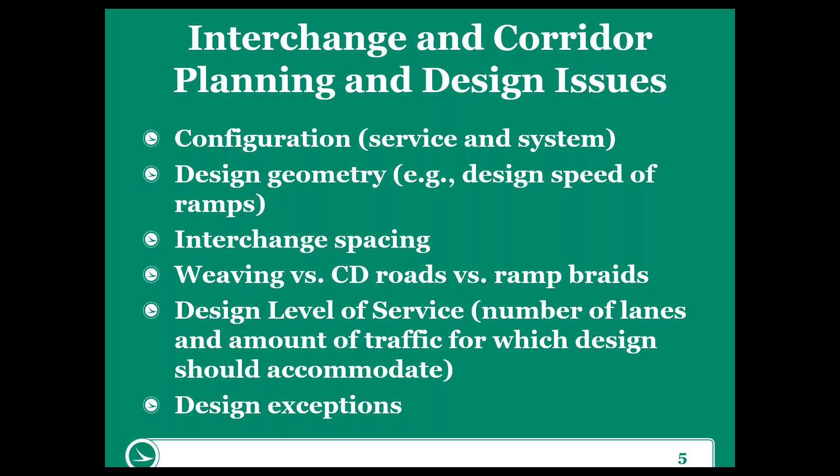So there are some chapters on freeways and ramps. They were originated by NCHRP Project 17-45, originally to develop a tool called ISATe - an Excel-based tool, the Interchange Safety Analysis Tool Enhanced, as they called it. It was an Excel-based tool to complete freeway safety analysis based on a combination of research that had been done for freeways and interchanges.

The research - this was some of that research. If you remember on last Thursday, we talked about how the HSM was a combination of past research and research specifically commissioned to develop the Highway Safety Manual. For this case, the freeway analysis fell into that latter category, and the research for freeways and interchanges was completed in late 2011 and finally ready for publication in September 2012. That's why it wasn't included with the original HSM.

They wanted to roll out the HSM as soon as they could, so they went ahead with the chapters and site types - rural two-lane, rural multi-lane, urban and suburban arterials - in 2010. They followed shortly thereafter with the freeways and interchanges, approved for publication in 2012.

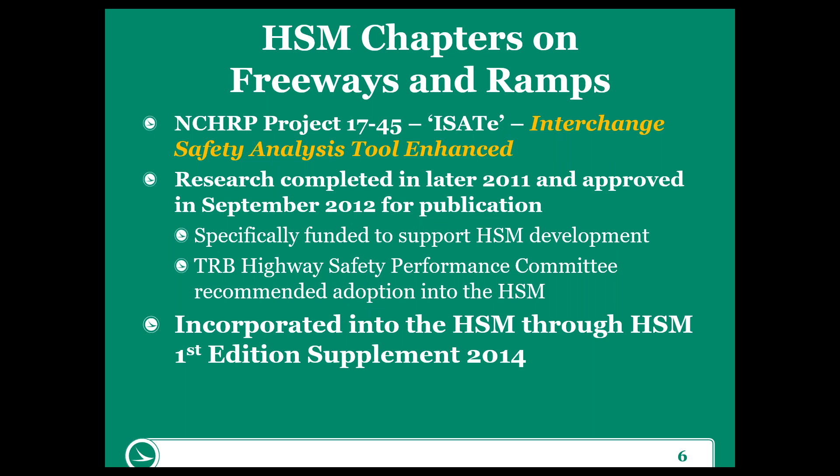Now, by approved for publication, that meant the research project itself. It wasn't until 2014 that it was actually rolled out into a published volume of the Highway Safety Manual, becoming what's called the First Edition Supplement 2014. That includes chapters on both freeway segments and also ramps - and when I say ramps, that includes the ramp segments themselves and the ramp terminal intersections with the cross streets.

So what are some of the Highway Safety Manual freeway applications? This is going to sound very familiar because it's similar to the other site types we've talked about. We're able to predict crashes before and after we reconstruct a corridor - that should sound familiar, we talked about predicting crashes before and after construction for all the other types of roadways. It's going to allow us to evaluate the effects of adding new features, such as a new interchange.

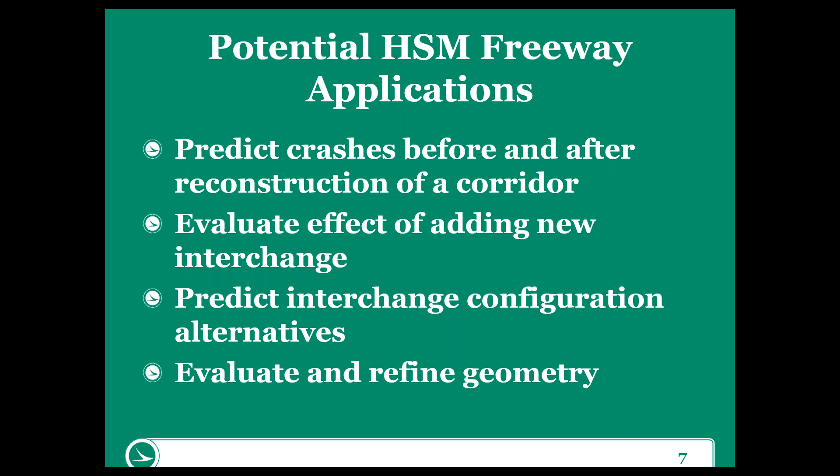We can predict differences in expected safety performance between different interchange configuration alternatives, and then we can also evaluate and refine geometry as we're working our way through the design process.

The crash prediction for freeway segments and interchanges is essentially the same structure as what we talked about on Monday. It's a statistical modeling process, very similar to the other chapters. There's safety performance functions, crash modification factors, calibration factors, and similar to chapters 10, 11, and 12, data from California, Maine, and Washington State were also used in developing those models.

What is important to point out and of interest is that when developing the freeway models, it required a lot of data collection, and it just wasn't feasible to do that data collection on the ground. So in this case, Google Earth was used to obtain the horizontal and cross-sectional data on hundreds of miles of freeways and interchanges. And why do I tell you that?

Because that's giving you the hint that the majority of what we can do can be from a desktop perspective. It does not require a ton of extra effort. It shouldn't be more than what you have historically done when looking at interchanges from a safety perspective, and it can be accomplished quite easily with a majority of data using tools such as Google Earth or the road viewer options.

Of course, it's always better to have plans, as-built plans, or real data measured from the field. But the reality is when we're dealing with some of these larger improvement projects, particularly at the planning stage, we don't have the time and often the budget within the safety studies to go out and collect that data in the field.

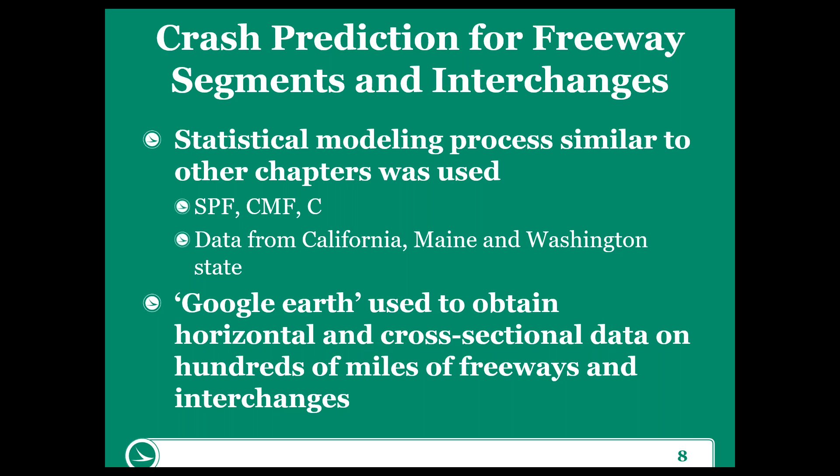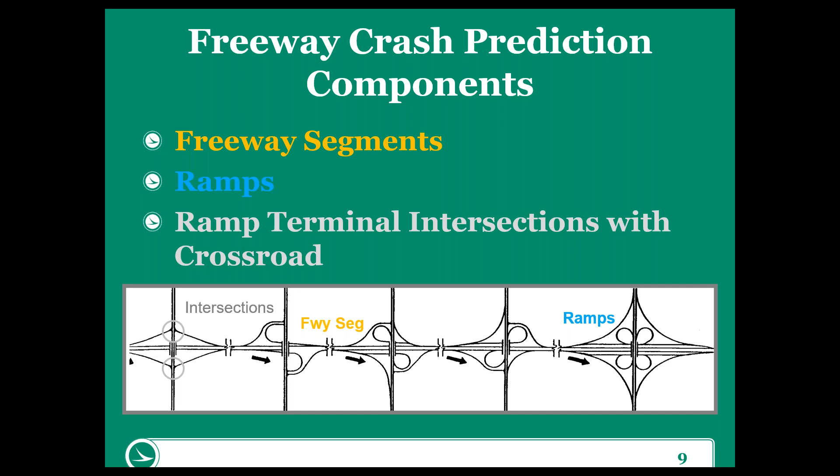Why do we care about this? Well, like I said, there are 3 components of the chapters 18 and 19 that refer to freeways and interchanges. As we talked about, freeway segments, ramp segments, and then the ramp terminal intersections with crossroads are covered in those 2 chapters.

So what I wanted to do with the next couple slides is really just talk through and show you what kind of data is needed. If you recall back on day 2, Alex showed the additional data that you needed to collect for roadways as compared to what you previously did with safety. The type of data is very, very similar.

You're going to collect your basic roadway data: length, number of lanes, area type. You'll document where there's curves, you'll document cross-sectional information, you'll also collect roadside data, and then you'll collect details on the ramp access. So this is all information that you need to know when you're doing freeway segments.

You might think that freeway segments should be very simple. They're typically very consistent. In fact, freeways tend to be more consistent in terms of design than the other types of roadways that we talked about last week, but there is still the same type of information that is needed. This is because there has been a lot of research documenting the effects of changes in each of these data points and what those effects would have on safety.

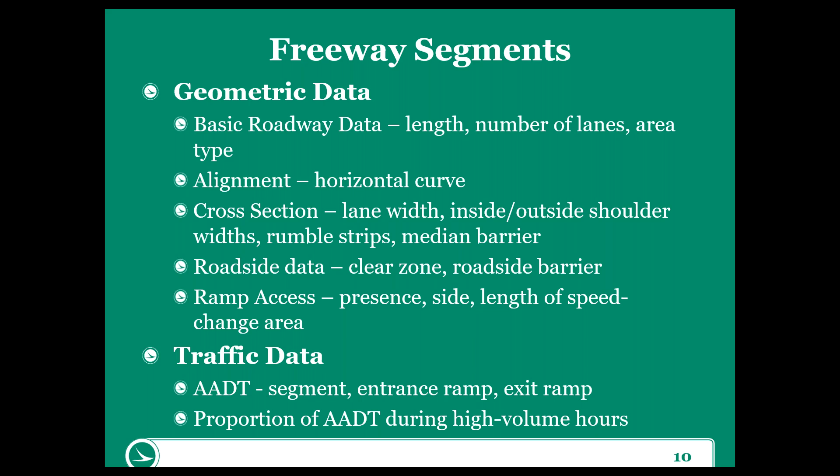We also have to have information on AADT for freeway segments, for entrance ramps and exit ramps, and sometimes the crossroads if we're doing the crossroad analysis as well. And then in the case of freeways, there is an attribute that we collect to allow us to calculate a ratio that is an approximation of congestion, and that is the proportion of AADT during high volume hours. So freeways are just slightly sensitive to the congestion issue when it comes to predicting crash frequency and safety performance.

And so we want to make sure that we go over all of that with you so you have a good understanding. The freeway analysis, particularly freeways and ramp terminal intersections, is probably the more labor intensive of the analyses that you might do, because it requires more of that design detail to capture the effects on safety.

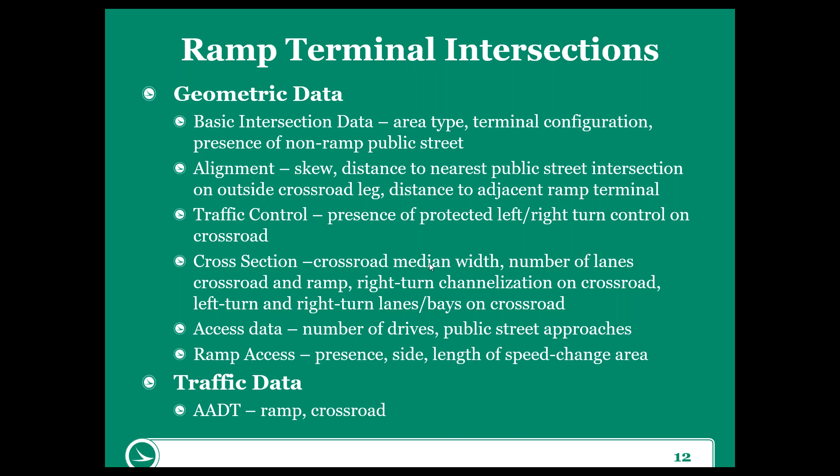In Freeway Analysis in ISATe, if you were to use that tool—and some of you from out of Ohio might have experience using ISATe—you know, it's something you can access through AASHTO's website, and that tool analyzes both directions of the freeway at the same time. So when you're entering information, even if you're doing something that might change only one side of the freeway, the model actually asks you to submit information on both sides, and you get the whole cross-sectional appreciation of the effects on crashes.

There are some situations with significantly different cross sections or differing number of lanes by direction that require a special analysis approach, and we'll touch on that briefly. But the good news is ECAT, which is what we do in Ohio, actually allows for analysis by direction. They've set it up so you can indicate that you need to do only the directional analysis—say you're just making an improvement at a ramp or a pair of ramps on one side of the freeway—then you're able to do that analysis in ECAT by direction.

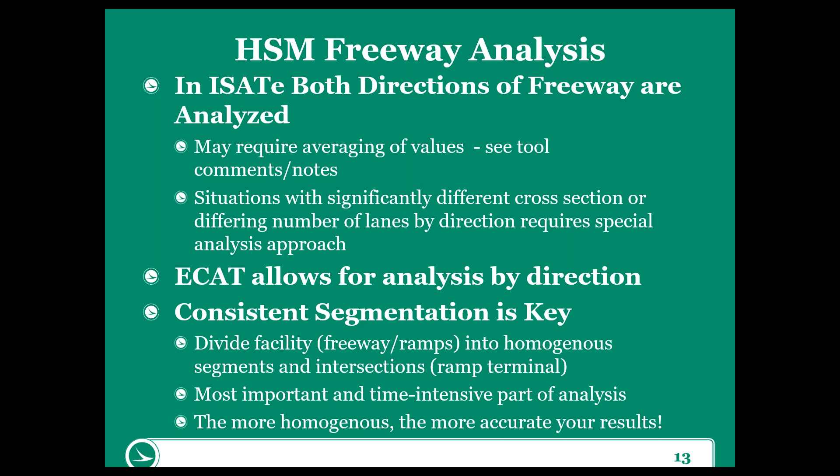One thing we like to point out that's particularly important—frankly it's important in any analysis we do, but especially in freeway analysis—is getting consistent segmentation. You need to divide your facility, your ramps, into homogeneous segments, and also separate out the intersections. Doing this segmentation is the most time-intensive part of the analysis, but the more consistent all the variables are within a particular segment, the more accurate the results will be.

So there are some limitations. Presently, there are some site types that are not addressed: facilities with HOV lanes, freeways with managed lanes separated by a buffer zone, ramp metering is not covered, frontage roads are not covered, and speed change lanes at crossroads.

And what do I mean by that? I mean the merge and diverge areas on the crossroads, when you have a ramp introduced to the crossroad and merging with the crossroad. If you have a formal acceleration lane from that ramp before you merge into the crossroad traffic, that is not specifically evaluated like it is on the freeway segments.

Geometric elements that are not addressed: vertical geometry is not taken into consideration. Greater than 10-lane freeway segments presently cannot be analyzed, and also greater than two-lane ramp segments.

Differing barrier types—the process does not differentiate the impact of different types of barrier, cable versus Jersey barrier versus guardrail. A crash is a crash in this context, even if they might produce slightly different results in terms of severity. But some of this is changing—they're doing research to increase the number of lanes on ramps and freeways that can be analyzed, and you should expect to see that at some point in the future.

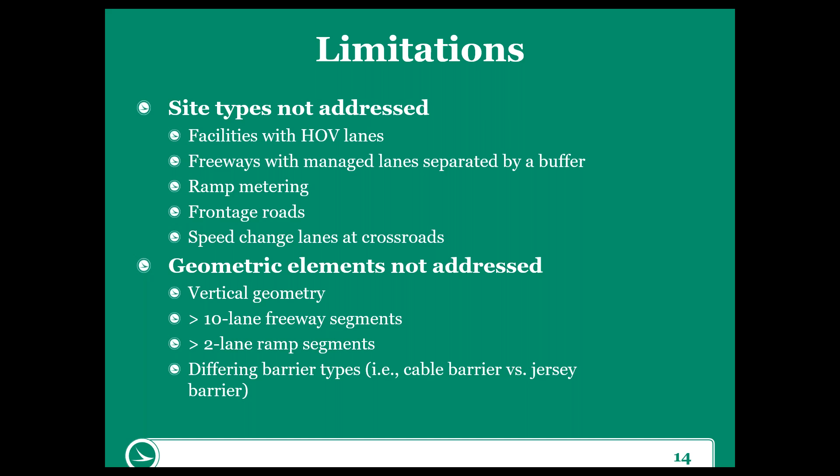Regarding those special conditions we talked about: freeways with barrier-separated managed lanes can be analyzed if you're analyzing the general purpose portion of that facility—the normal lanes not restricted to a particular type of traffic. However, the managed lane area, usually in the median, assigned to express lanes or HOT lanes, high occupancy toll or high occupancy vehicle lanes, is not considered in that analysis—it's treated as part of the median. The analysis is then performed for the general purpose lanes, with the managed lane entry and exit points treated as entrance or exit ramps.

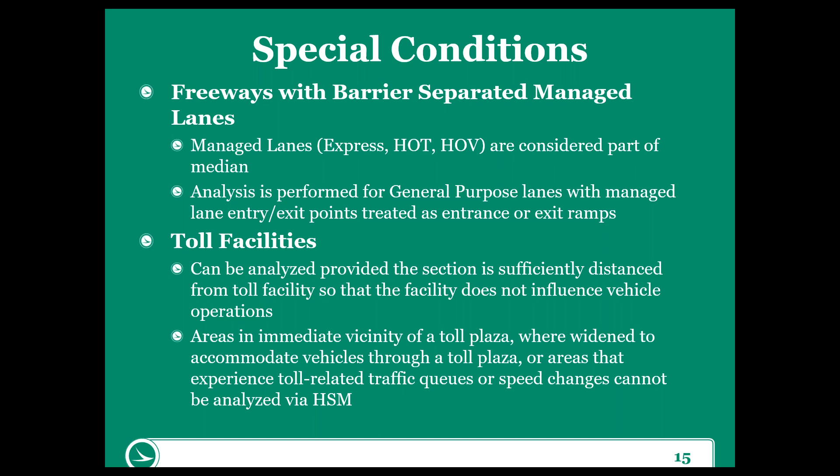So really, when we say we can do managed lane facilities, we can do partial analysis. Toll facilities can also be analyzed, provided the section represents something very similar to a normal highway section. It needs to be sufficiently distanced from the toll facility so the tolling booth doesn't influence vehicle operations. The areas in the immediate vicinity of the toll plaza—if widened to accommodate vehicles, or areas that experience queuing or speed change lanes to exit and enter the tolling booths—those are not part of the area analyzed using the HSM.

Calibration, similar to what we talked about last week. The models in chapters 18 and 19 are derived from multiple state databases. The key to note here is, the reporting thresholds vary state by state. So we'll talk about that when I discuss use of an uncalibrated model.

Many times, some of the first uses of the new Highway Safety Manual analyses were for freeways. Back in 2012, 13, 14, 15, and still now, many states don't have HSM calibration factors. The good news is for freeways, you can still do a pretty good job of evaluating a roadway system. Obviously it's preferred to be calibrated, and ODOT has the calibration factors, so you don't really have to worry about it if you're working in Ohio.

But if you're outside of Ohio, an uncalibrated model for freeways is still a particularly good analysis tool. One reason is freeway design from state to state is a little more consistent, because rural two-lane, multi-lane, and even urban and suburban arterials can be very context sensitive. But the consistency exists more in freeway type facilities as you transition across the country and through different states. So it still is a very effective tool.

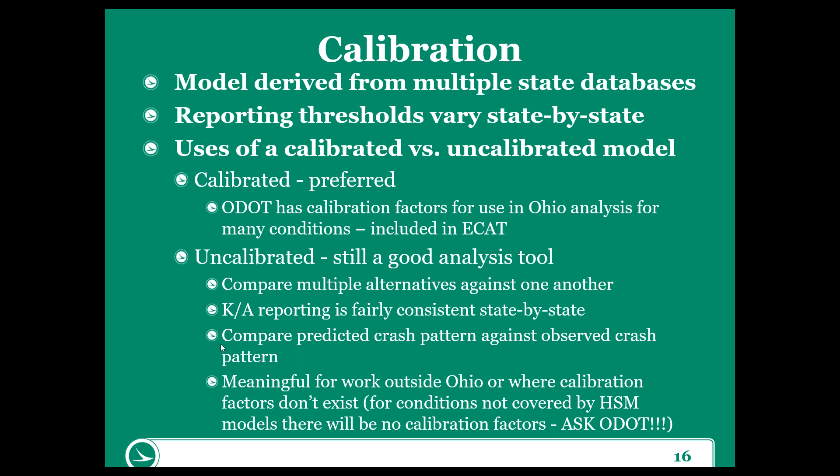You can, if you're going to evaluate different alternatives, compare predicted crash patterns against observed crash patterns, and that is still a very meaningful metric. You can't necessarily say you can predict what you would actually expect to happen for a facility, but you could say you can predict the impact or what might happen if you implement a certain change or treatment. You could see whether crashes go up or down, what the order of magnitude of the change is, or whether you should expect a change in severity due to a particular geometric change or improvement.

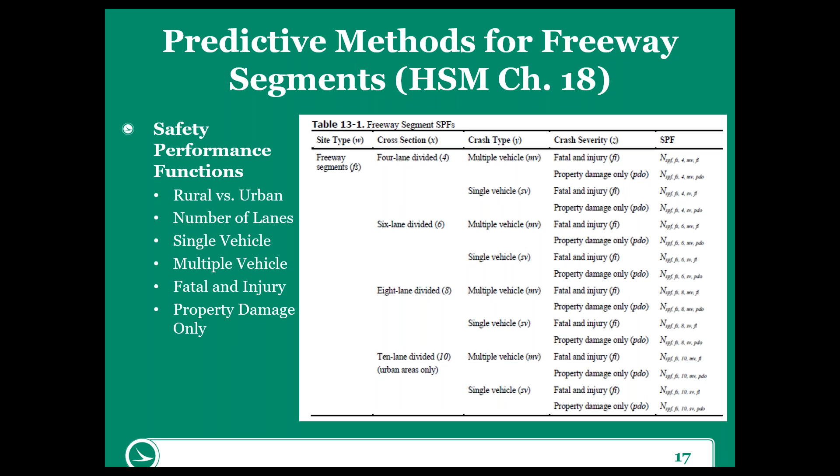So for the predictive methods for freeways, this is what you have to deal with when dealing with your safety performance functions. There are quite a few of them—rural versus urban, number of lanes, single vehicle, multi-vehicle, fatal and injury, property damage only. The good news is, generally speaking, it's the same general form of the equation, but with different variables that go into calculating the values that come out of those.

So this is what one of those safety performance functions might look like. If you remember on Tuesday, we had a nice smooth single line for what might be a rural two-lane. In this case, looking at a freeway segment, we might have multiple lines—multiple equations, or curves—depending on the number of lanes and whether it's rural or urban. If you plot these on a graph, you might see something like this.

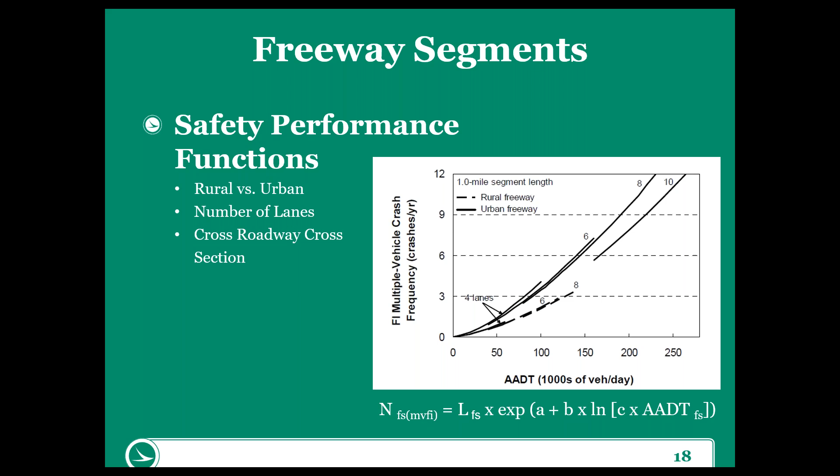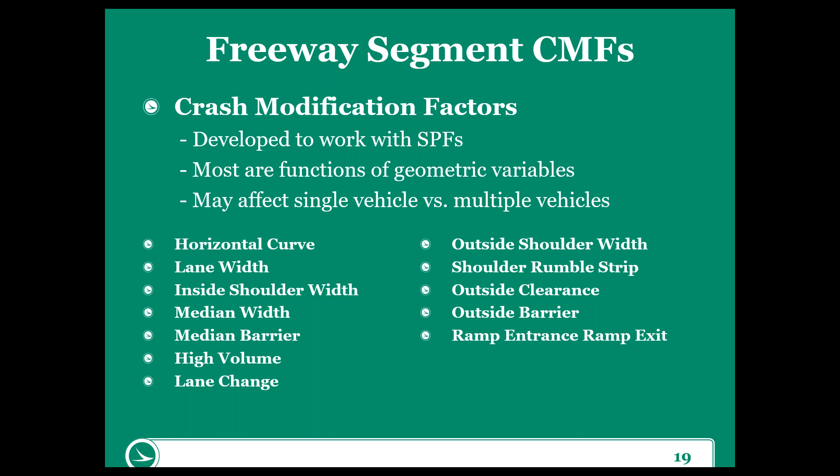In the case of freeways, we actually look at things in terms of single vehicle versus multi-vehicle type collisions. A couple of the attributes that we really want to point out that are important to understand, we're going to go over those now. Median barrier is one of those.

It can seem quite intimidating when you're actually trying to evaluate a segment that might have multiple bits and pieces of median barrier, because they can be installed continuously or they can be installed in pieces to protect individual objects or areas of concern on the side of the road or in the median.

So the key things are, when you're calculating and estimating the impact of a median barrier, you're going to need to know the length and the offset to the median and the roadside barrier. And then, if you're dealing with a continuous barrier, you're going to want to know the width of the continuous median barrier. What do we mean by that?

What we mean is when you have continuous barrier in the median, you would look at it a couple of different ways. If it's only on one side of the road, then there's a very specific value used for the width, depending upon the type of barrier.

If you happen to have continuous barrier on both sides of the freeway, then you would count the width as the face-to-face distance, from barrier to barrier, basically treating that area within the median between the barriers as one solid median that cannot be crossed. So that width of the median barrier becomes the distance between the two continuous pieces of barrier on each side.

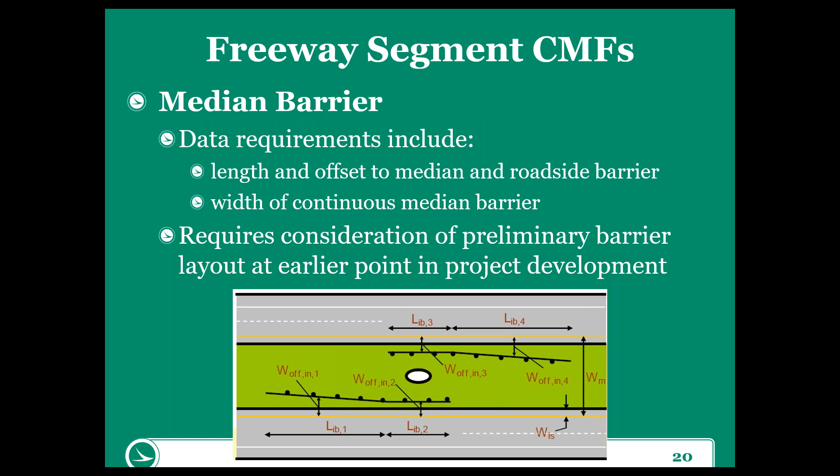Another attribute that you need to be aware of is high volume. If you remember the volume variation during an average day, we develop a proportion of AADT that occurs during the hours where the volume exceeds 1,000 vehicles per hour per lane. This is intended to capture situations when hourly volumes are continuously high, or perhaps some situations where there are a few high peak hours, to help us capture the effect that congestion might have on safety performance.

What you do is sum up the total volume during those hours that exceed 1,000 vehicles per hour per lane, and then divide that by the total ADT for that section.

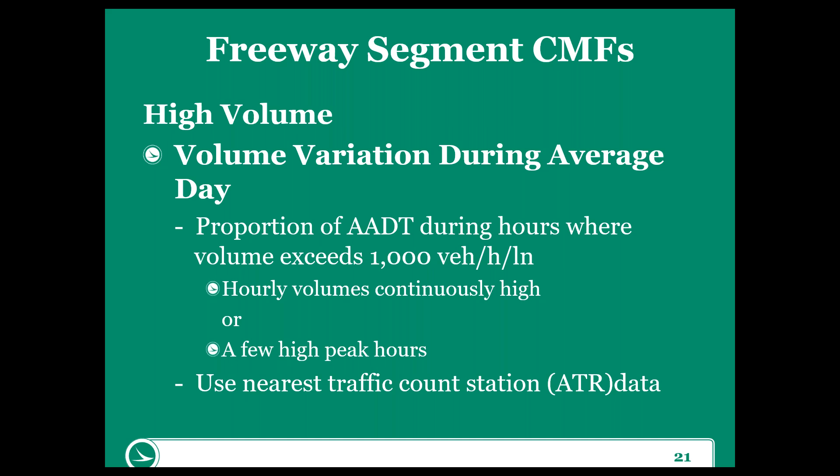To capture this data, the best thing to have would be an actual traffic count, but when you're doing safety studies, we don't often have that information. In that case, you would typically use your nearest traffic count station, ATR data, to help you estimate it. If you do not have one nearby, you would want to talk to ODOT.

Another key thing that influences safety - most of this is probably common sense in that it makes sense these would influence crashes. But what's especially critical is to capture the spacing and the actual distance between ramp entrances and exits.

Ramp spacing does impact what's called a lane change CMF. What that captures is the turbulence in the segment immediately upstream or downstream of an entrance or upstream of an exit. It captures the impacts of that turbulence that happens as vehicles try to switch lanes to get into position to exit, or once they enter, to get merged into the normal traffic flow.

It is a really useful metric during the design phase. It helps us understand how the impact of the spacing of ramps would impact the safety, or the anticipated safety, on that particular segment. It also lets us look at things such as what happens if we remove a ramp entirely.

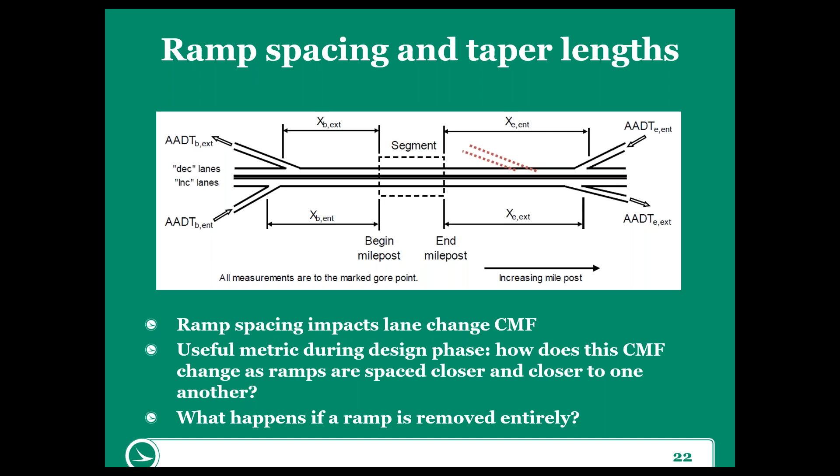Really what this is, they discovered when they were doing the modeling and developing the models that the models didn't quite capture this one particular condition. So by entering the appropriate information, it's able to recognize if it is a type B weave, and that would trigger this supplemental CMF associated with it to add in the appropriate crash prediction associated with that specific weave type.

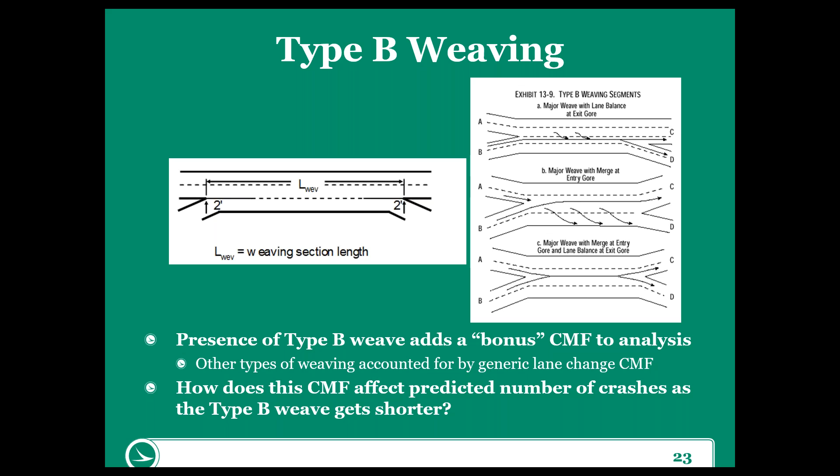So next one - ramp spacing and taper lengths are incredibly important. You need to, when entering data on a freeway segment into ECAT, know quite a bit of detail on your ramps. You need to know whether it is a lane add entirely or a speed change lane.

Lane adds are in the HSM. There are some specific lengths of that area. Basically it's whether or not you treat that lane addition - that full width lane addition that's part of the acceleration area - as a full lane as part of the freeway, or as part of the ramp acceleration area. It's really dependent upon the length of that area.

You need to define the length of the entrance and exit ramp between the taper point and that 2-foot gore separation, and establish which side it's on. That's if a ramp is in the segment.

If a ramp is outside of the segment, what we're concerned about is whether there is an upstream entrance or a downstream exit. Again, back to that comment earlier about trying to capture the effects of the turbulence that happens in those areas upstream of your segment and downstream, and what impact that has on the segment itself.

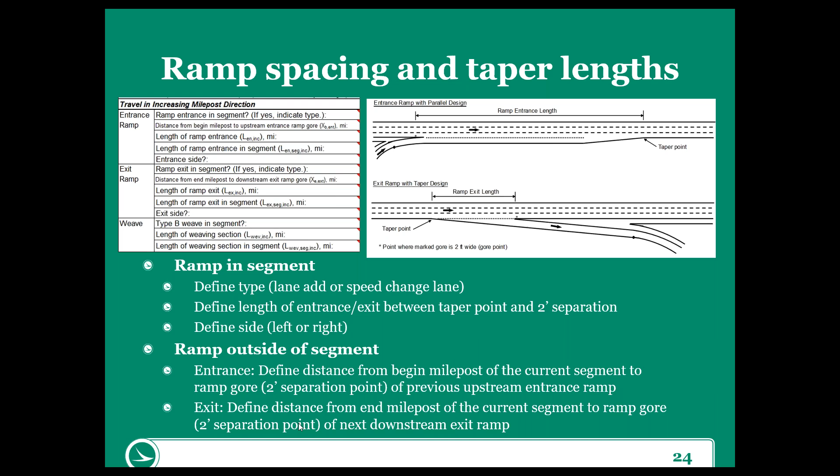For ramps or CD roads, like I mentioned before, we can't do frontage roads, but we can do CD roads because CD roads are treated like ramps. So when we do ramps or CD roads, we treat them like mini road segments, doing the same thing we would do to any segment.

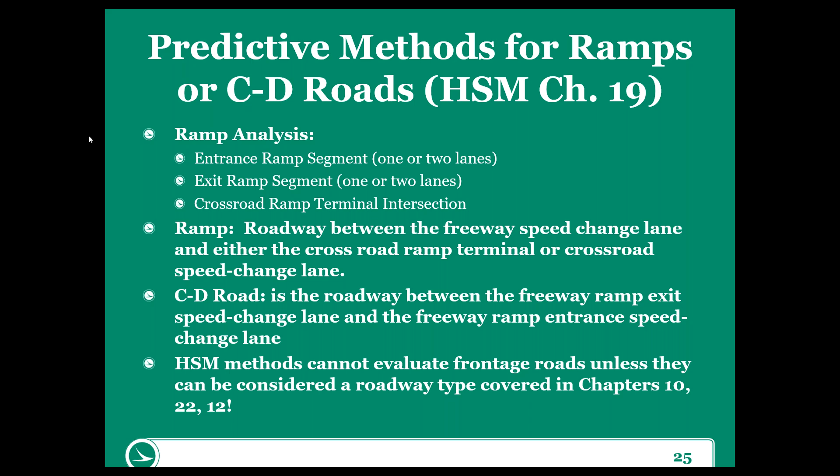We divide it into homogeneous segments. The things we're concerned about: is there another ramp merging into the segment we're looking at, or another ramp or ramp lane exiting from that particular segment? We can also do different types of segments - an entrance ramp segment, an exit ramp segment, and crossroad ramp terminal intersections.

For freeway ramp segments, like I mentioned, it's segment based. It works for all ramp configurations up to 2 lanes presently, similar to freeway segment analysis, and is also used to analyze CD roads. If you have one consistent cross section throughout the entire length of your segment, you could treat it all as one segment.

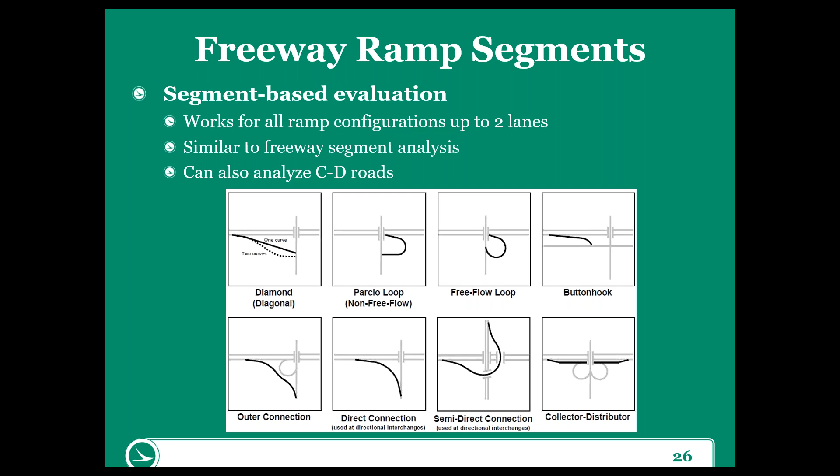But typically speaking, you're going to probably see some changes, possibly in shoulder width or other things, maybe lane width within the limits of your actual ramp. So then you would need to do the same thing you would on any other roadway segment. When one of the items changes, for ramp segments, if one of those attributes changes, it's probably a good idea to cut a new segment and segment your ramp.

This looks very similar to the freeway. The freeway safety performance function for ramps is defined by whether the ramp segment is an exit ramp, an entrance ramp, or a CD road. You'll consider area type, meaning urban versus rural, and the number of lanes.

Something that I don't know that I pointed out yesterday, and I don't know that Alex pointed out necessarily, and even if we did, I'm gonna repeat it. When we're talking about area type, you need to be very cognizant of what we're dealing with. We are not looking for you to define area type by functional classification per se. You may be able to establish that generally. However, if, for example, in freeway situations, it's probably fairly fair to do it using functional types.

You should be considering the design in terms of helping you determine whether it is a rural or an urban design. If your existing location is a rural design, even if it's on a road that is functionally classified as urban, you're still going to analyze it using the rural tools. So I just wanted to point that out.

I don't remember that we specifically stated that, but really any of these models that we're using, we should be doing them based on what the design tells us that it was designed for, the area type. So that is what we should be doing when we're looking at evaluating something from the existing conditions.

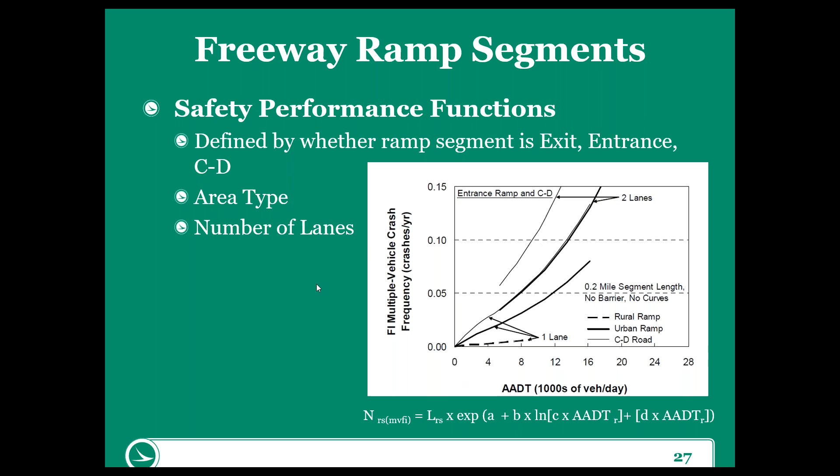You'll be documenting whether or not there's a curve. You'll document things like the lane width, the shoulder width, whether it's the right or left shoulder. You'll determine if there's barrier on the right or left side or both. Do you have a lane add or a drop? Do you have another lane entering or exiting the ramp itself within the limits of the segment you're evaluating, or upstream or downstream? And then is there a speed change lane within the ramp from another ramp connecting to it? That really probably happens more with the CD road type situation, but it can happen for individual ramps as well. And then specific to CD roads, you also evaluate the weaving section.

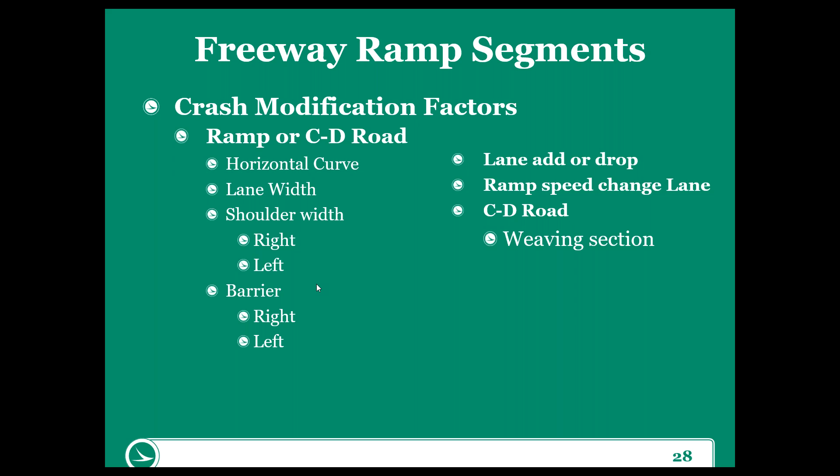So what are some of the key important attributes that you need to be aware of for ramp segments that sometimes can be a little confusing? For ramp segments, the big one really is mileposting. Mileposting is important because it's used to model the speed of the vehicle along a ramp.

Because what we want to know is the speed of that vehicle entering the curve, because that is what influences, by the time it gets to the curve, the safety performance of a particular ramp segment with a curve. So the milepost indicates the distance along the ramp to the start of the curve. And what you would do is establish one milepost 0 for all segments on the ramp, and then reference that distance to the curve from that milepost 0.

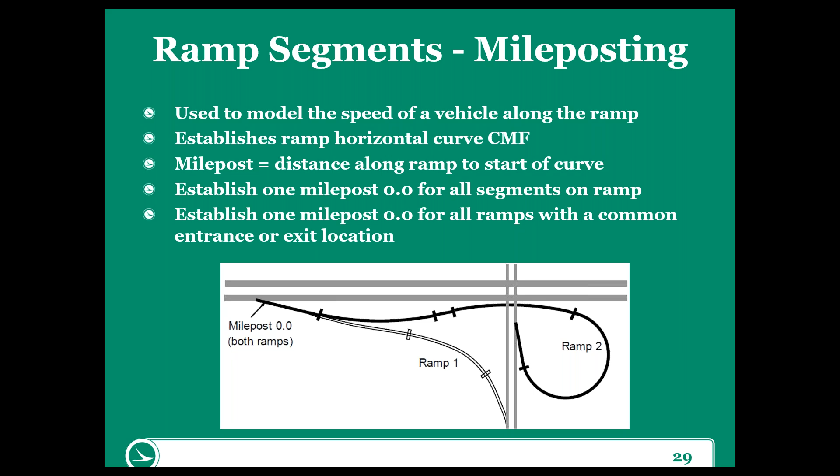So when you have a situation where you have common entrance or exit locations, you're going to establish one milepost. You can see up on the screen, we have that situation: we have one ramp splitting into two. So your reference point when you're doing your distances to the curves is always going to be from that same milepost for both of your ramps.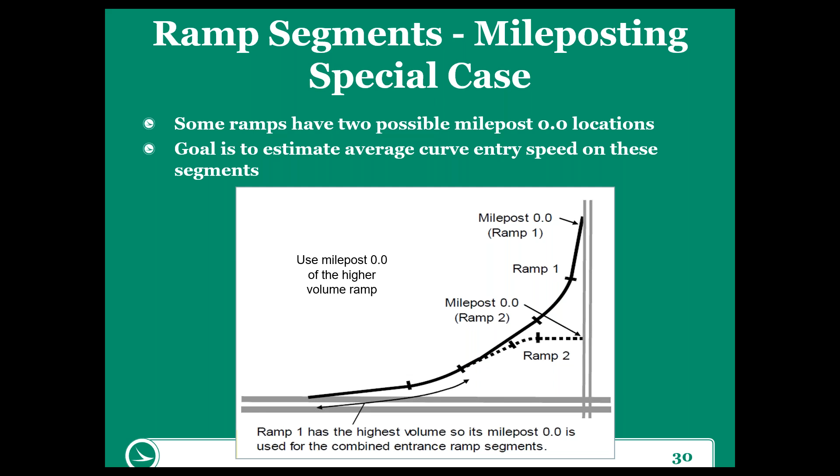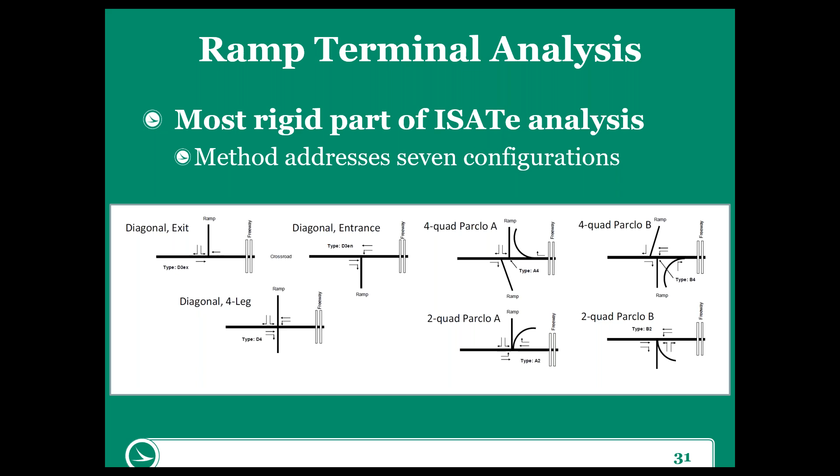This is why when you're doing freeway analyses of any type, you are coordinating closely with your district safety rep to make sure that you're doing it as best you can. The answer in most cases is not to not do it. The answer is usually to try to find one of the 7 analysis options that fit the closest, and then find a way to do some analysis based on that. That's one of the reasons why for freeways, you definitely want to be coordinating early with the SRT and your district safety reps to make sure you're following and capturing the analysis correctly.

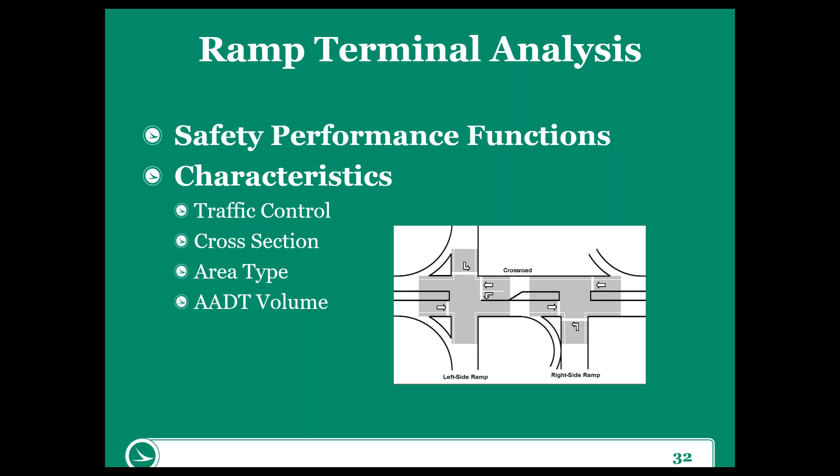So for ramp terminal analysis, the safety performance function is traffic control, cross-section, area type, and volume. And then the crash modification factors look at things like the other intersections we've talked about, but with a little bit more detail. It considers things like the ramp capacity, whether there's turn lanes on the crossroad, if there's access points in the vicinity of the crossroad ramp terminal intersection, segment length, the median width, skew angle, signals. There's a lot of information you need to know, and actually these intersections, of all the site types in the HSM, both volume 2 and this supplement, tend to be the most complex.

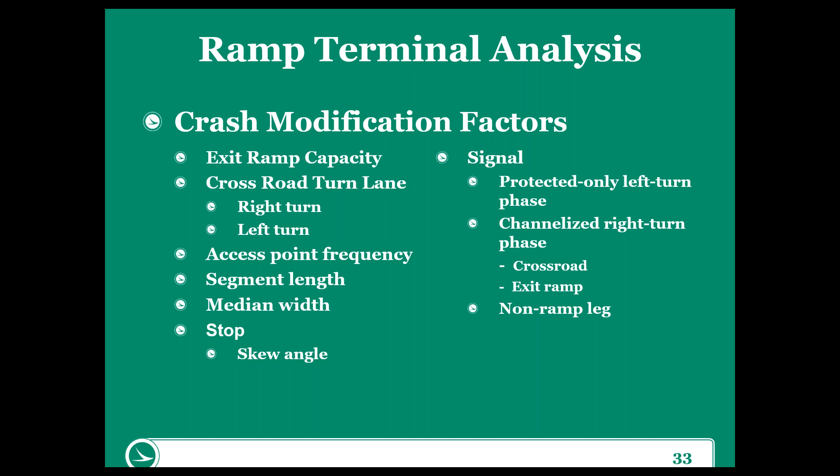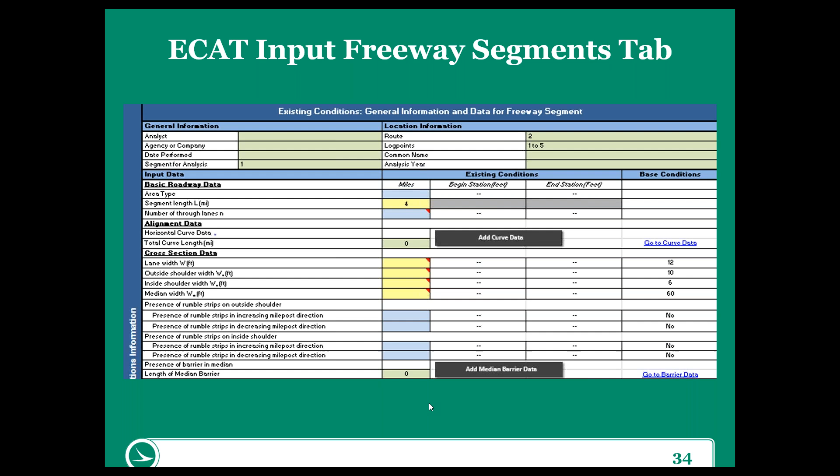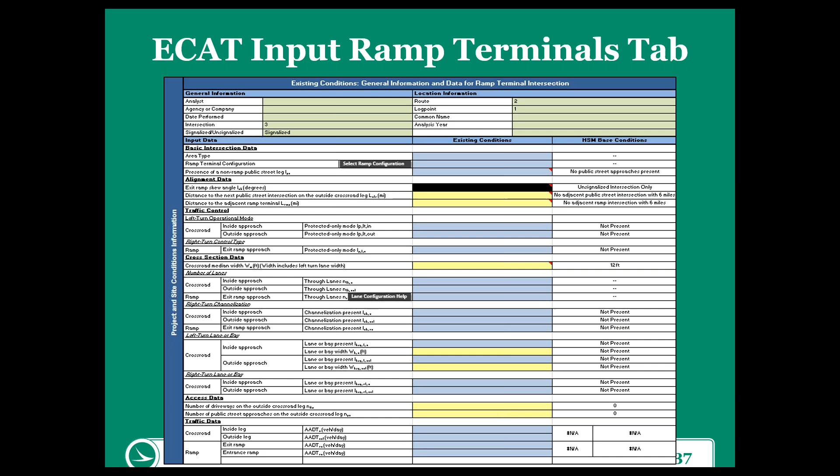A lot of data, to be honest with you, and that's why we are spending some time just to go over freeways, because a couple of the attributes are particularly challenging, like I mentioned before, and we want to make sure you have some familiarity with those attributes that probably might create issues for you when doing the analysis, and that you should definitely be considering. All questions are acceptable, but you will potentially encounter a few more bumps when you're trying to learn how to do these types of analyses.

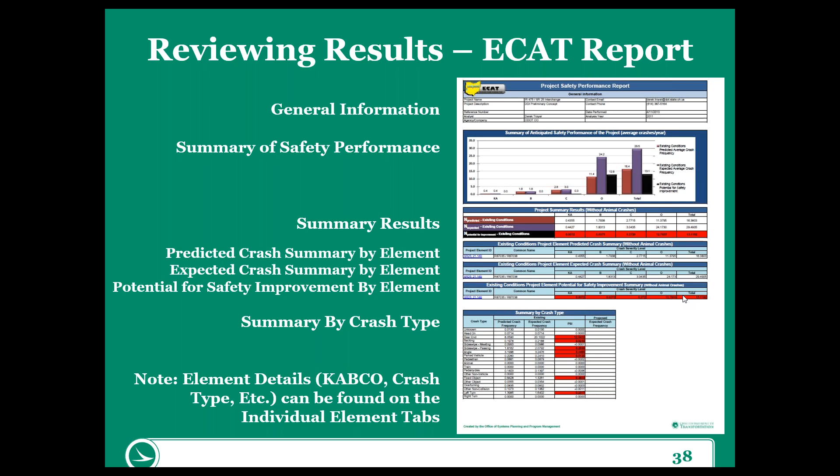This is just a larger blow up of what you saw before. At the top, you'll see your totals, your overall, but then you'll see your predicted, expected, and potential for safety improvement by element. In this case it was just one intersection, but if you have multiple intersections, ramps, and freeway segments, you'll see all of those listed, and you'll be able to figure out which are the areas of highest priority.

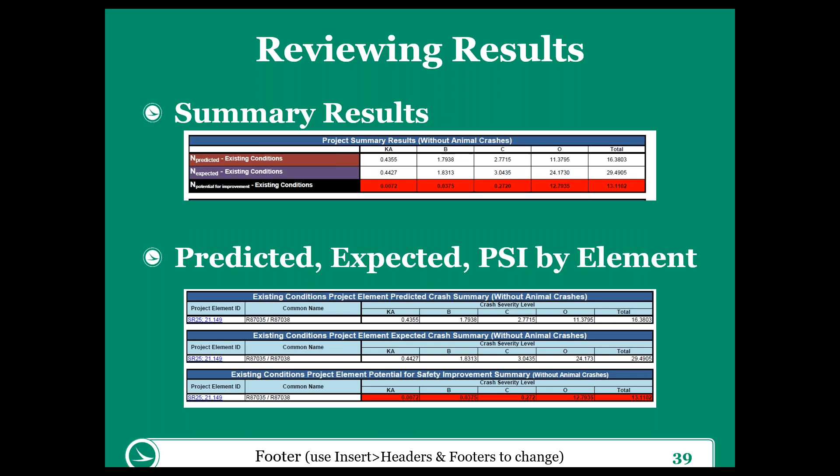I'll say it looks to me like the slides are out of order, they're backwards - reviewing your results, this is the top, and then the summary. Finally, you'll also see a summary by site type when it comes to the different crash types themselves.

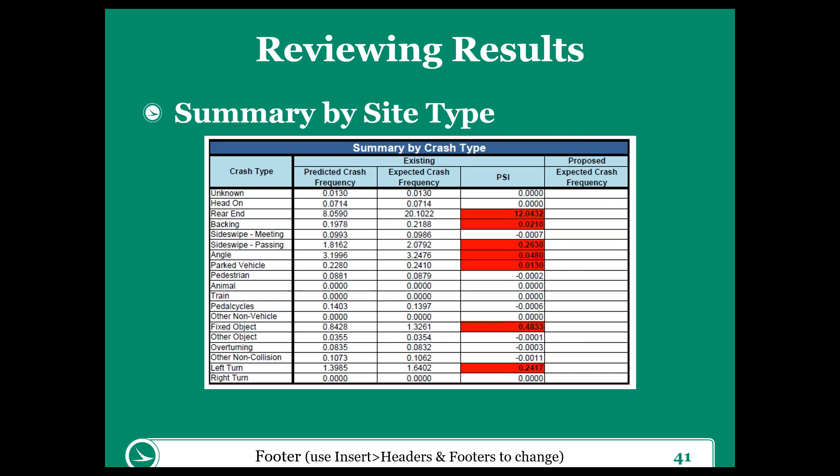So for freeway safety studies, this is where we talk about what you do when you're trying to do your freeway study - what does this all mean to you? It's a lot of information. There are a lot of specialty details you need to be aware of, and if you're dealing with a pretty big study area, the analysis can be pretty cumbersome and lengthy.

When you get to the point of scoping at the beginning, this is where you'll discuss that in more detail. You need to discuss every freeway safety study with your district safety rep before you get started, to make sure you're capturing the limits they want to see. You may only be dealing with one ramp, but ODOT might come back and tell you that you need to capture an upstream entrance at a particular exit ramp of concern, so your study area needs to go all the way upstream to capture that. You need to have a conversation with ODOT so that you capture everything they need, and so you don't do too much - it could snowball quickly if you start analyzing a whole interchange.

10 plus years ago, when we did interchange analysis, sometimes it was the whole interchange where we would do the safety study review.

In this case, we do want to be very specific, use our money and our time wisely, and focus on the areas that we need to focus on and nothing more.

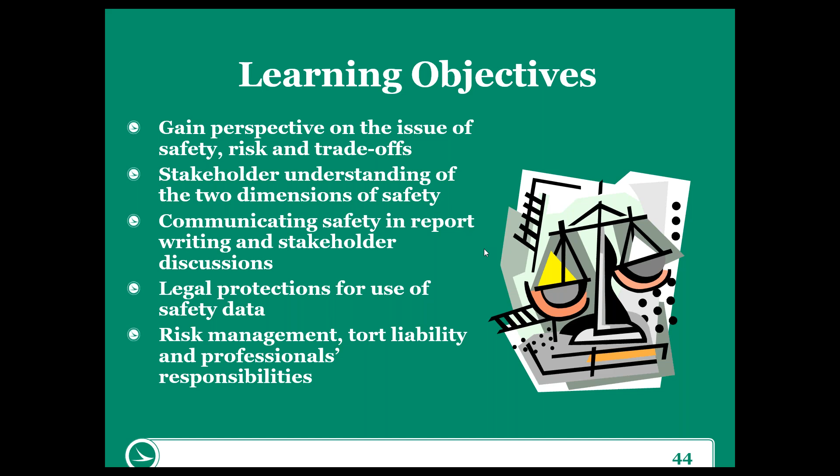So back to what we talked about at the very beginning, there are two dimensions of safety. There's nominal safety, which is examining in reference and in compliance with standards, warrants, guidelines, and design procedures. And then there is substantive safety, which is really what the HSM is all about, which is what we actually expect to happen in terms of crash frequency and severity for a highway or roadway based on the actual conditions that are there, based on the context.

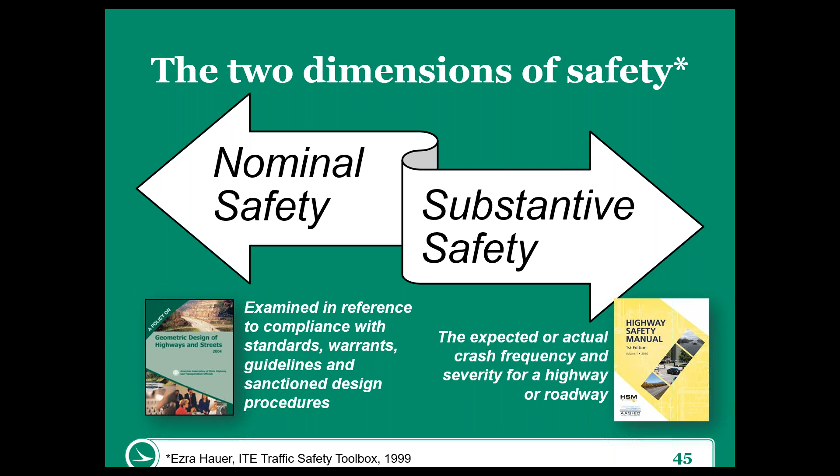Why is that important? Well, most people think of things traditionally in terms of nominal safety. That's what we were all used to doing. How many times have you seen something referenced as whether or not it meets standards? That is the reference a stakeholder or the general public would use. So with the ability to communicate more detail from the HSM, there is a greater responsibility that we understand how to communicate that correctly.

So just a refresher, nominal safety, what is it? It's examined in reference to compliance with standards, warrants, guidelines, and sanctioned design procedures. There were three key aspects of nominal safety used when establishing a design criteria or standard.

Roadway design must enable road users to behave legally, first and foremost. So that is a primary concern. In many cases, if you have a certain speed limit or a certain design, you have to be able to drive on that road or use that road in a legal fashion. It can't force you to go too fast or too slow, etc.

The roadway design should enable the vast majority of users to operate without difficulty. So the design should allow you, if you follow the rules, to operate in the roadway environment as a typical road user without any sort of difficulty.

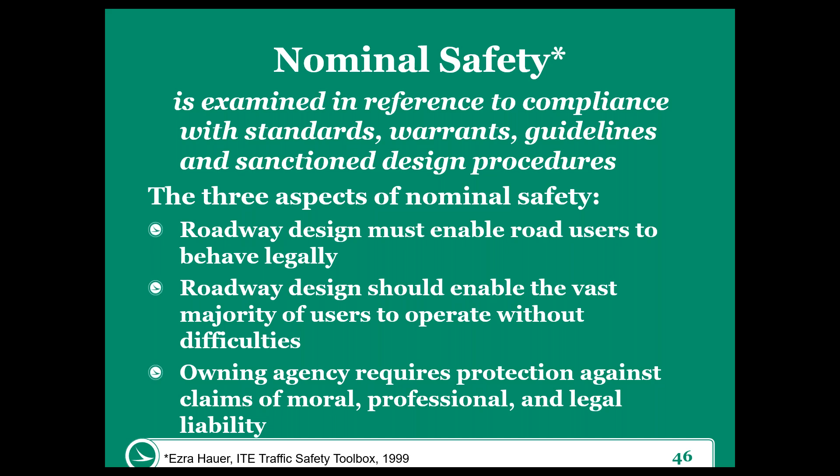And then the owning agencies that use these standards and nominal safety guidelines require protection against claims of liability. How do they do that? Oftentimes they measure things against whether or not they have met standards. So that will come to play later in our conversation.

It's important to note that the AASHTO Green Book and the L&D manual are not safety manuals. They are comprehensive, dealing with traffic operations, cost, maintainability, constructability, and safety. Nominal and substantive safety are not the same thing.

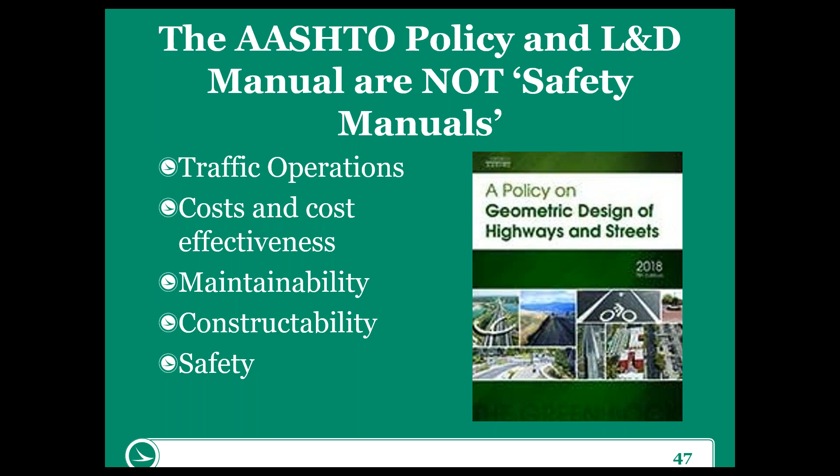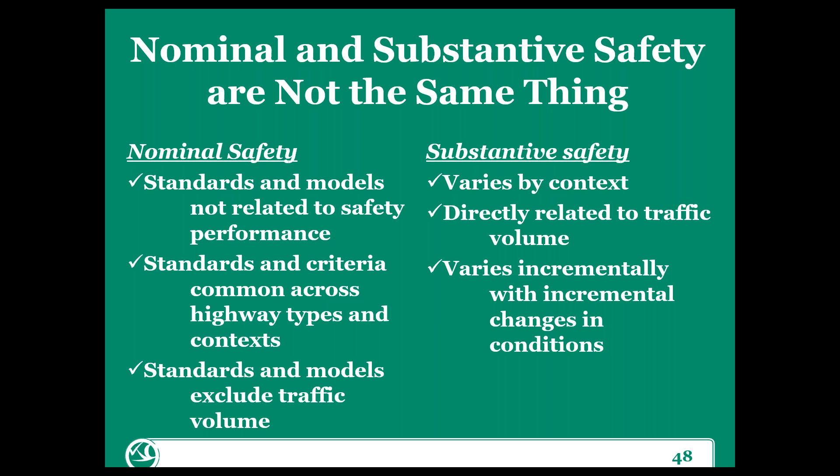Safety is only part of the equation they consider. Again, nominal and substantive safety are not the same thing. We deal with nominal safety in terms of standards, models, criteria, and those types of things. Substantive safety in the HSM varies by context, is directly related to traffic volume, and varies incrementally with incremental changes in conditions. As we talked earlier, those two dimensions of safety produce two different outlooks.

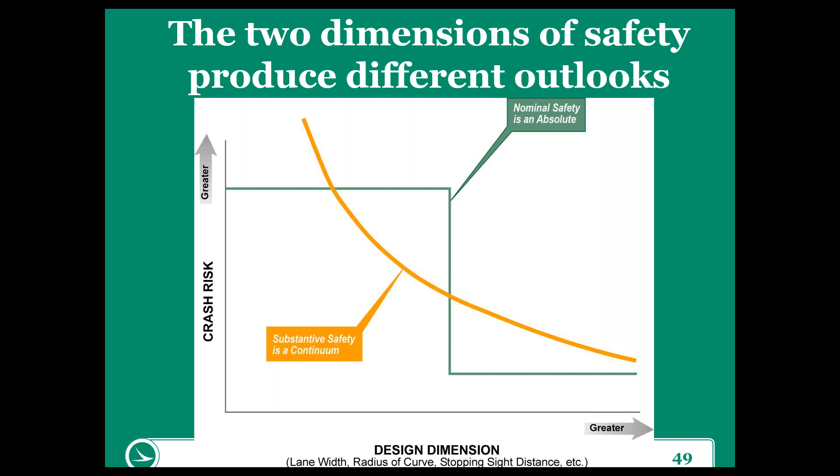Why do we care? Because now we have to start talking about how we deal with balancing safety with other factors. When we're explaining our decisions to stakeholders and to the folks we're writing these studies for, we have to keep in mind that our results and analysis will be used as part of this conversation.

We know that we cannot build every road to be, quote unquote, the safest road all of the time. It's simply not financially possible. We may have alternatives that we're evaluating, and the one that would provide the best performance in terms of safety may have too many other impacts to make it a feasible alternative.

We need to be able to explain why, because when we tell somebody we cannot do that alternative for whatever reason, they need some understanding of why, since in many people's minds safety is the number one priority. And if we don't provide the alternative that is, quote unquote, the safest, it really feels very risky.

When we started this process, at the time, the thinking was that safety always comes first. But no, it really doesn't, because we have to make these compromises. But we hear it all the time: safety comes first, we can't trade off or compromise safety or we could get sued.

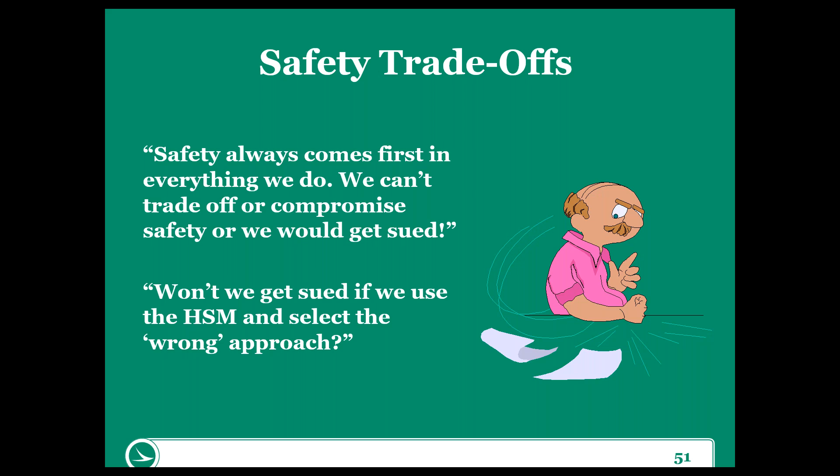Like I mentioned before, we don't always take the safest road. We routinely trade off safety in many decisions that we make. Maybe we aren't aware of that, but these are good things to point out, such as shoulders and guardrail versus right-of-way for clear zone.

This is a big one. The best condition on the side of a road is to provide the appropriate clear zone, because then when a vehicle leaves the roadway, it has either the ability to recover and return to the roadway, or if it doesn't, the impact severity is hopefully as minor as possible, with nothing on the side of the road to strike.

But the reality is we can't always do that. So we put guardrail in place, knowing that it's there to be hit, because either there's another asset we need to protect, or the impact to that guardrail and the redirection it can provide is still a better chance at being less severe than the impact to the asset itself.

Rumble strips and bicycle mobility: continuous rumble strips along the side of the road make sense from a vehicle perspective, but they don't from a bicycle perspective. Turn lanes and signals are another example.

When you install a left turn lane or a protected left, there's a compromise. You're installing a protected left to somehow reduce angle crashes, but at the same time you recognize that you're going to be increasing rear end crashes.

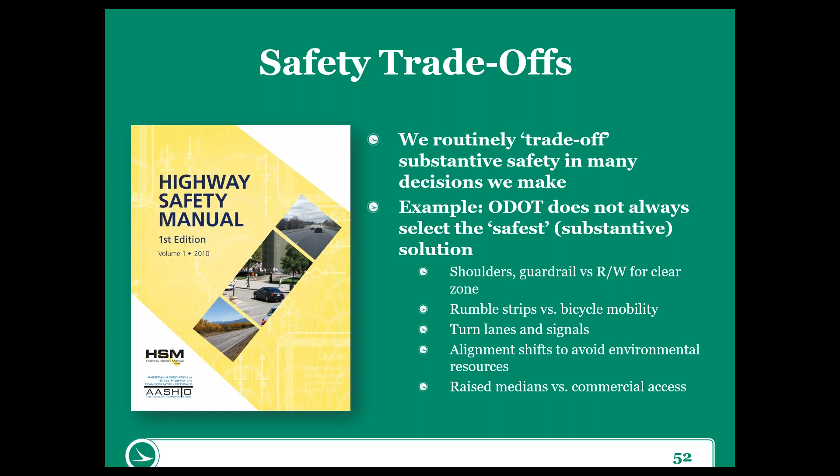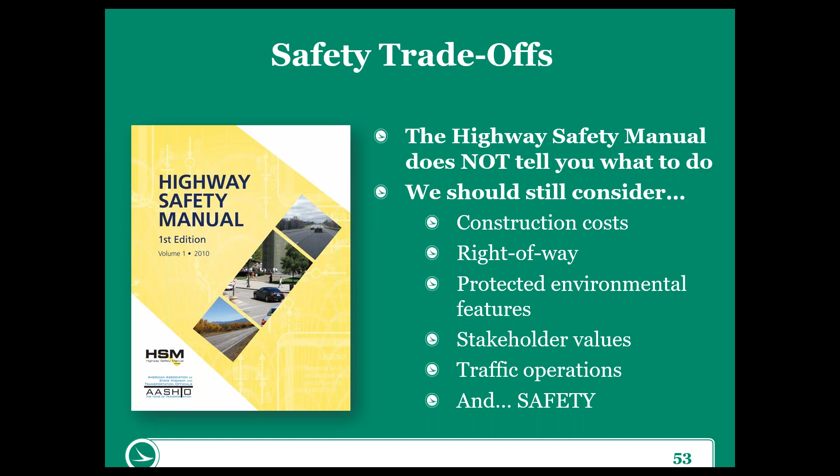It's not going to tell us that based on the results of your safety analysis, you have to do something specific. If you're doing that, you're not considering the other things that are part of the discussion, which include costs, right-of-way, environmental features, stakeholder values, traffic operations. These are all the things, along with safety, that you should consider when making a design decision or choice.

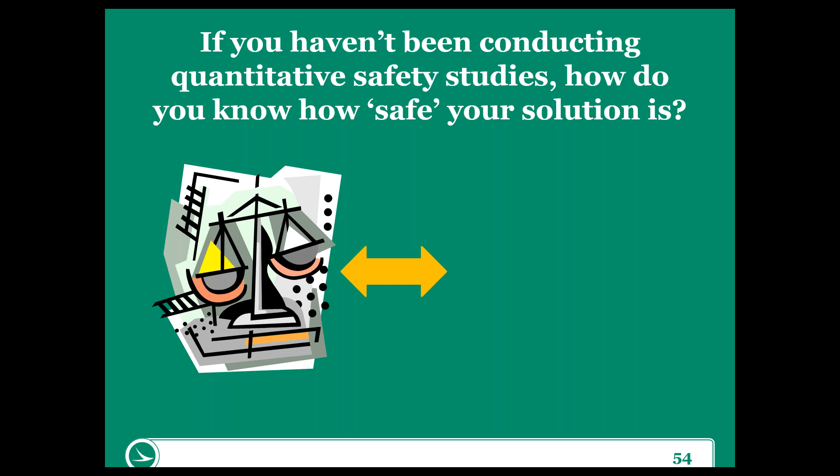Now back to the discussion: what if we use the highway safety manual and we determine that we're going to select an alternative that doesn't show the best safety performance? Many people propose that maybe it's better off not to use this at all. Well, that is not a good response, because if you haven't been conducting safety analysis, how do you know how safe your solution is? You really don't.

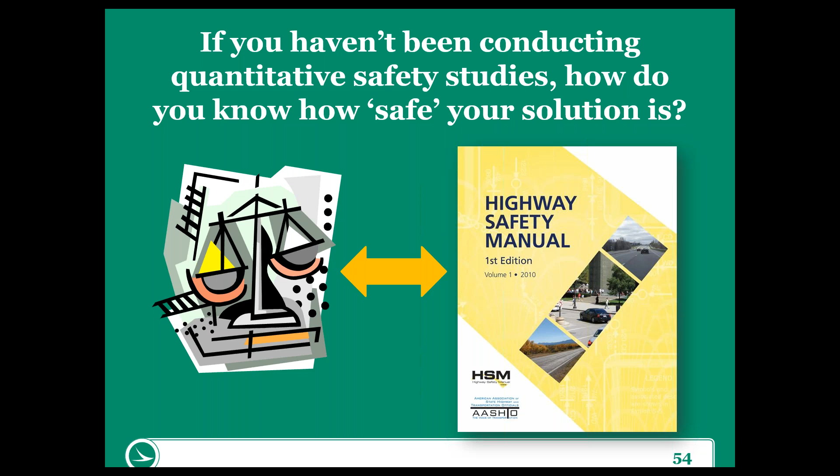There are also other ways you can use the highway safety manual when you have a situation that is perhaps not the highest in terms of safety performance. There are other things you can incorporate into your design that could help mitigate for that, and that's another good way to use the highway safety manual. But frankly, we need to know how that safety performance is going to perform for alternatives, so we can really determine the right path forward.

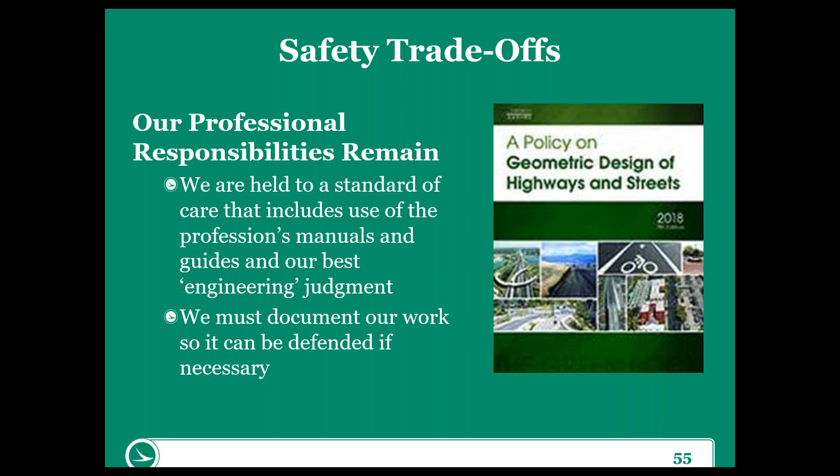When it comes to safety trade-offs, our professional responsibilities remain. We're held to a standard of care that includes use of our profession's manuals and guides to apply our best engineering judgment. We now have the highway safety manual in that mix. That's one of those guidance documents that, because it is there, we should be and are obligated to be using. Another key important part of this is, as we go through this process and make decisions regarding trade-offs, we have to document our work so it can be defended if necessary.

So let's talk a little bit about stakeholder communications. How do we translate this into something meaningful?

One of the things we need to do when talking to stakeholders is recognize that many still think of things in terms of standards. When you say that doesn't meet standards, it has a connotation of something negative, which we have to work to discourage, because that's not correct. Something not meeting a standard does not mean that it's unsafe. It doesn't mean we're even going to have a safety problem associated with that design deviation.

So it's going to be very important that we learn to understand how to communicate these kinds of things, and that standards aren't always representative of safety, they're there for a different purpose. So how do we do this more effectively? Use tools like the Highway Safety Manual. It can help you understand and then ultimately communicate the relationship between a design element and crashes.

You can be prepared to go into a discussion and say, if we are going to reduce these lanes from a 12-foot to an 11-foot lane, but in order to gain 4 additional feet in shoulder width across an 8-lane section, you're able to walk in and say, here's our expected safety impact. We expect crashes may increase because of the reduction in lane width by this much, but that's going to be offset and overcome by the greater benefit from the added shoulder width.

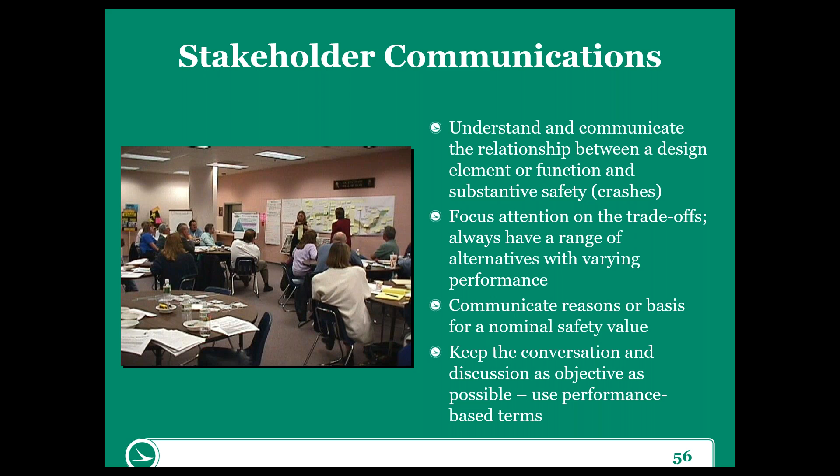And make sure you're keeping that conversation and discussion as objective as possible, using performance-based terms. Don't talk in terms of words like safe versus unsafe - we don't want to do that. Now, I've done that here in this presentation, but you can't see my hands go up and do the quotes. I try not to talk about things in terms of whether they're unsafe or safe. It's simply not the appropriate thing to do.

What you want to do is stick to the facts. Say this is going to increase average annual crashes by 1 crash per year, or this is going to decrease by 2 crashes per year, or we would predict that this particular area would have this many crashes per year. But don't say anything about whether it's high, or dangerous, or poor, or a high accident site. Use benchmarks if you can. If not, stick to the facts and talk about what you have in detail instead of making a judgment call.

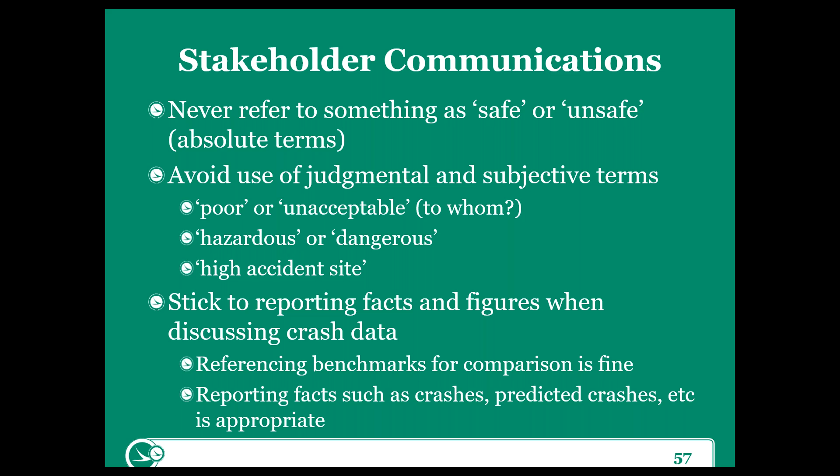Our job is to inform our stakeholders and the public about the analysis. It's not to tell them how to interpret it. Let them interpret it how they want to. If they see that it's an issue, then let them make that call, and don't plant that seed for thought.

When you're dealing with best practices for risk management and safety analysis - how do you deal with it? You're going to include the appropriate disclaimers and notices regarding legal protection of data in reports that cite crash data.

I'll show you that in just a minute. You're going to edit reports for the unnecessary subjective language.

Stick to the facts. When I write my reports, I always give it to the editor and say, I need you to make sure you scrub it for these types of terms. Don't let me accidentally say high crash, or provide any sort of safe or unsafe terminology in this document.

And when you do have to select an alternative that doesn't compare in terms of safety as the highest performing or best performing alternative in terms of safety, document the trade-offs and the decisions.

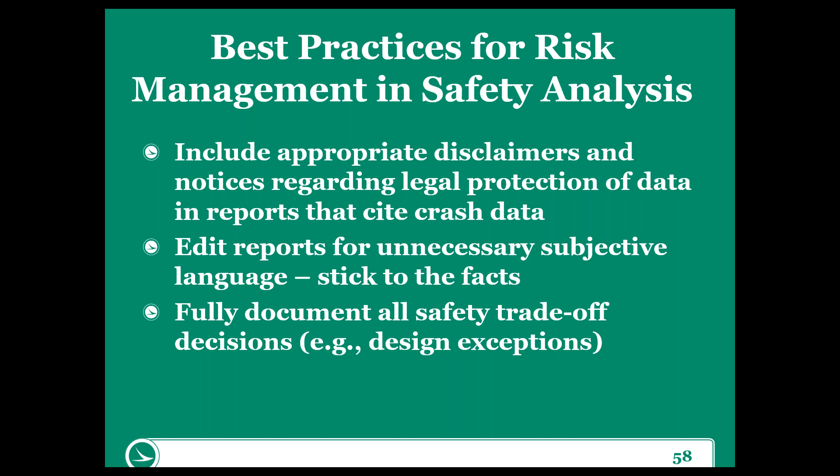This also applies to other things outside of safety studies. This is a really good example of what you can also do in design exceptions.

Safety data is protected under federal law. What federal law states is that the data and reports generated from that data can't be used against ODOT in tort suits.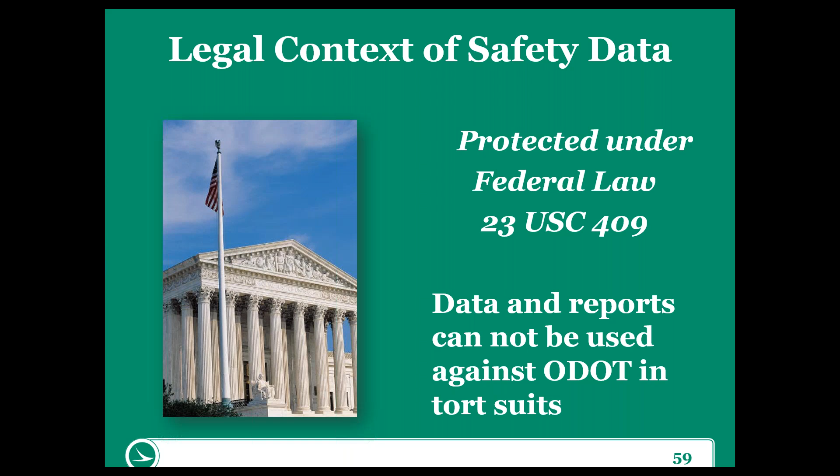So if we do an analysis and determine the relative priority in terms of safety for a particular location, and we don't necessarily act upon that immediately, ODOT can be protected because it's not possible to address everything that you study. The study is the first step, and so ODOT is protected.

And that kind of information in Ohio is really great. We have a great chief legal at ODOT who knows their stuff, and we know how to handle this in court.

But it is just something to note that every state is different and every state has different laws. So while ODOT does protect in their own laws against that as well, you should check with your own state to determine if those protections exist.

So other considerations: how can you use some of what you learned today for more than just safety studies? Talking about best management practices for risk management in planning and preliminary engineering. Always evaluate the nominal safety solution for comparison to the solution that you're doing.

If somebody's going to say, hey, but it doesn't meet standards, what does that look like? Does it have a worse impact on safety? Go ahead and evaluate that alternative that meets the standards. This is standard practice anyway when dealing with a design exception, but it should be standard practice when dealing with proposed alternatives to provide a basis of comparison.

You will justify on considerations other than cost alone. That's a tricky one when you're saying something's the cheapest option, or it's the most expensive option and we can't do it. So it's best to put other variables in as part of the trade-off discussion.

You can use the HSM to test the effect on safety of planning and preliminary engineering design considerations. You can also use the HSM to mitigate.

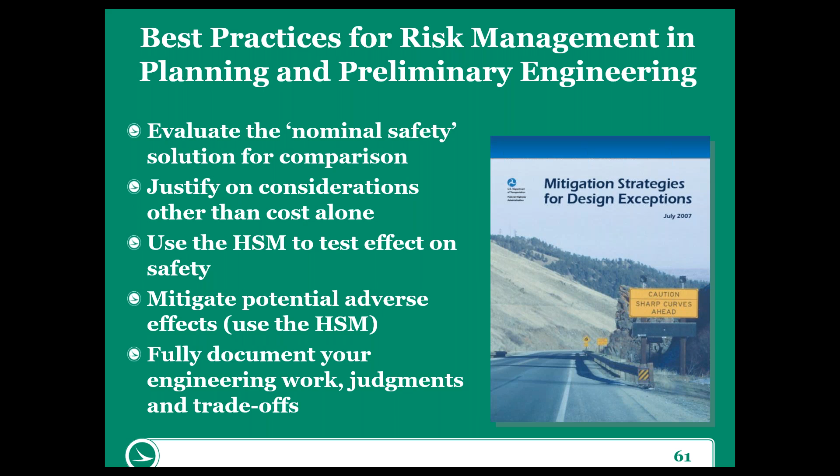And then make sure you fully document your engineering work, any engineering judgment and trade-offs that you have. What about in design and project management? The biggest one is document. You need to document all of your design decisions, particularly when they deviate from standard policy and procedure.

Big ones: where there is a design decision and there's no design report or record of why the design was implemented, or a design with an apparent error for which there's no explanation. Oftentimes we make decisions and it is documented, but then those things disappear. That can be a real issue.

And so this is just something to keep in mind, why we are documenting what we're doing at the safety study stage, but we should also be documenting everything that we do throughout project development.

Another area we want to talk about is that failure to follow or implement a documented procedure or established policy in completing the design can also be an area of issue and potential liability for ODOT. That goes with what we're talking about today—situations where we need to appreciate the impact on safety, and if we make a decision that differs from a design standard, we need to document that and why, because there's an expectation the department will follow established policy unless there's a documented reason why.

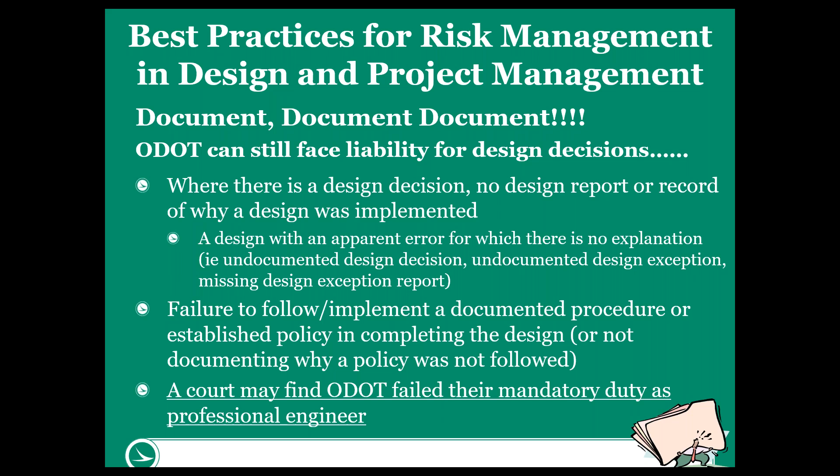The HSM does help when it comes to documenting the impacts on safety. If someone gets in a crash and comes after ODOT because a design didn't follow standards—maybe a shoulder width could have been larger—there's an implied negative impact to safety. But maybe there were other reasons for those decisions, and a safety analysis showed no differences, or that this was the best choice. Without documentation of those decisions, it's very difficult for ODOT to defend itself, and a court can find ODOT liable for failing their mandatory duty as professional engineers if they don't have that documentation.

So for those of you who sign design exceptions—some people say the record retention policy is 5 or 7 years, whatever it is. Frankly, any design exception I've ever signed, any document with my signature on it, I'm keeping forever, because I want to know what I have and what I've done, and I want that protection in place. That should be the same for anybody.

So, best practices for risk management and design and project management. Let's talk a little bit about this.

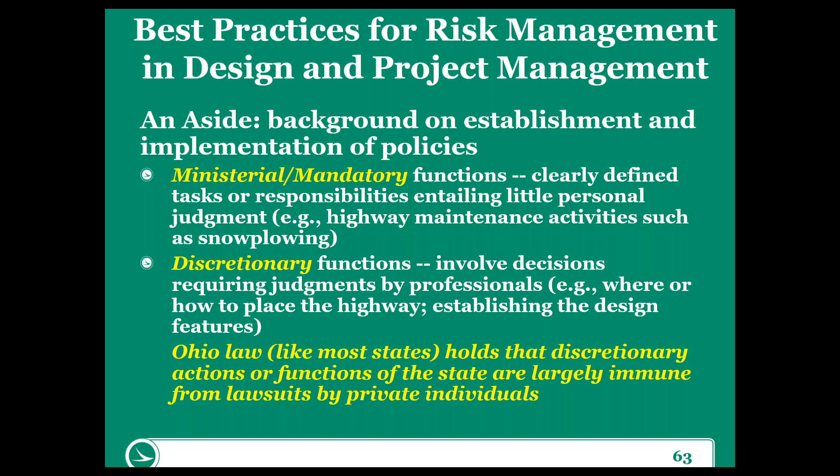Continuing back to that policy or procedure side—it's a little complex, but there's this whole thing about mandatory versus discretionary. Mandatory functions are clearly defined tasks or responsibilities entailing little personal judgment; highway maintenance activities like snow plowing can also be following an established procedure. Discretionary functions involve decisions requiring judgment by professionals, like how to place the highway and establishing design features. Ohio law holds that discretionary actions are largely immune from lawsuits. But what does this mean?

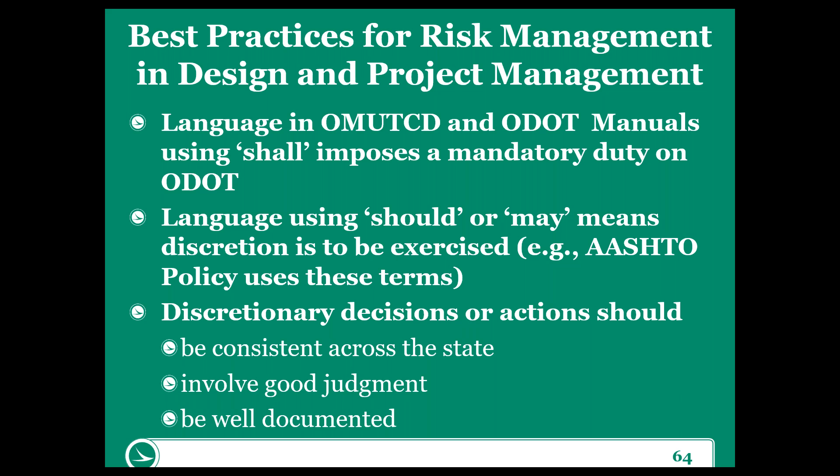There's some background here. Language in the OMUTCD and ODOT manuals using 'shall' imposes a mandatory duty. So while we're protected for things requiring our judgment, anything established as a standard, policy or procedure—particularly using the word 'shall'—is something we have to do. If we deviate from that, we better have good documentation. Language using 'should' or 'may' means discretion can be exercised. But just because you can use discretion, you need to document the discretion you're using. Any discretionary decisions or actions should be consistent across the state, involve good judgment, and be well documented. That is how ODOT protects themselves, and how we help protect ODOT against risk and liability.

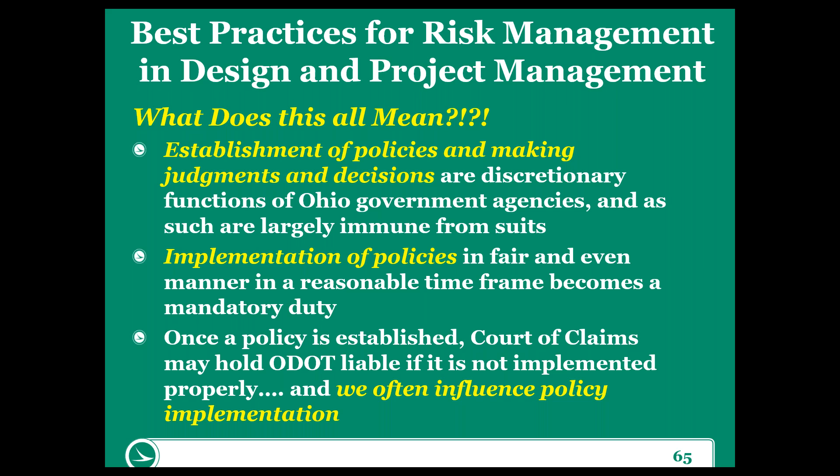So what does it all mean? Establishment of policies and making judgments and decisions are discretionary and largely immune from lawsuits. Implementation of policies, however, in a fair and even manner and in a reasonable time frame, becomes a mandatory duty. So once a policy is established, the Court of Claims could hold ODOT liable if it's not implemented properly. We often influence policy implementation in what we do—based on our safety studies, we're making decisions and evaluating alternatives and concepts based on their impact on safety, which can influence how policies are implemented. That's why it's even more important to document what we're doing and make sure we have accurate documentation.

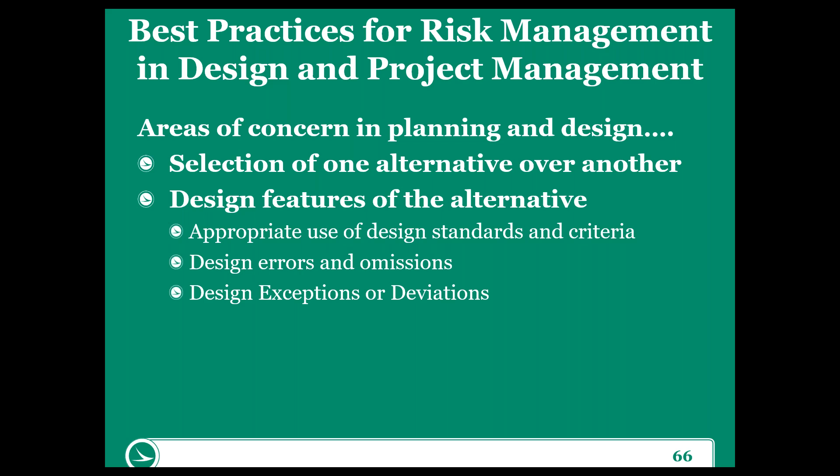So, some best practices for risk management in design and project management. There are areas of concern where this comes into play: selection of one alternative over another, determining design features of an alternative, the appropriate use of design standards and criteria, dealing with design errors and omissions, and design exceptions or deviations. These are all areas of concern. Obviously design errors and omissions is a big deal—while it's partly in our control and partly out of our control, there's also a way we can use the tools we have to help evaluate the impact of those as well.

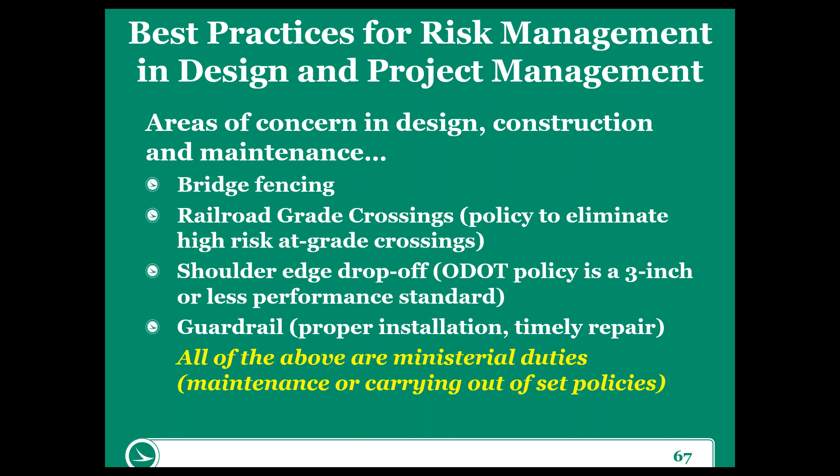So, areas of concern in design, construction, and maintenance, just to give a little bit more context to that failure to apply a policy or procedure in a fair and even manner. Where do these kinds of things apply? Grade crossings, shoulder edge drop off, guardrail, proper installation and timely repair. All of those are ministerial, or mandatory duties, carrying out of set policies. So anything that could influence that is something we also need to be aware of.

So what are the best practices to deal with this? How do we get ahead of this? One, we establish reasonable design criteria and adhere to them. Well, some might say, well, we have those, we have the design standards. But the reality is sometimes we have to set standards that are specific to a project.

That doesn't mean reinventing the entire L&D manual. It means we look at some individual design aspects and determine what's appropriate for that project. The key is once you determine what's appropriate, that you adhere to that and document the process. First, you document why you might have something that differs from the L&D manual or another manual, and then once you do, you follow that. That's very, very critical. Also, when necessary, you employ design exceptions and evaluate them properly.

You use the highway safety manual—I really want to test this in terms of safety—you use it to mitigate for potential adverse effects. That's the holistic approach to using this.

How can we help in what we do? Using the HSM now in the safety study process to inform a decision and documenting that, then carrying that through the PDP, the project development process, and documenting everything along the way. That's very, very important, and I think I mentioned this on our first session—very important that we consider safety in the decisions that are made, even at the planning level, all the way through to construction.

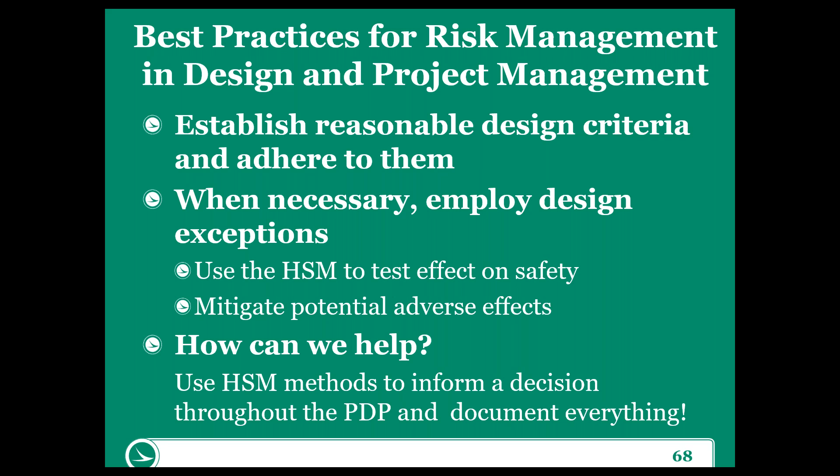When things are changed, it is not sufficient in construction for us to say, hey, if it's a pretty major design change or it changes a major design element, we needed to maybe take a step back and say, what is the impact on safety? And why were there decisions made earlier on in design to develop what was proposed compared to what you might do in construction in the field as a change?

So that was just a little bit of a deep dive into the thought process behind what you can do with some of the information we provided today. At the beginning, I talked a little about the freeway studies and freeway analysis areas, the flags that might pop up when you're doing the analysis. And then we talked a little about once you have all the analysis done, what can you do to set up your study, and the rest of the process as the project goes forward so that it can be most successful in terms of safety.

So tomorrow we do have module 4, which will be Alex, and he will wrap things up by talking about any additional studies you might need in order to complete your safety study, identifying and evaluating the appropriate countermeasures. Now that you have the analysis and you know what your potential for safety improvement is, how do you identify the countermeasures, move those, evaluate them, and get them to a project step or stage, then developing the plan and finalizing the report.